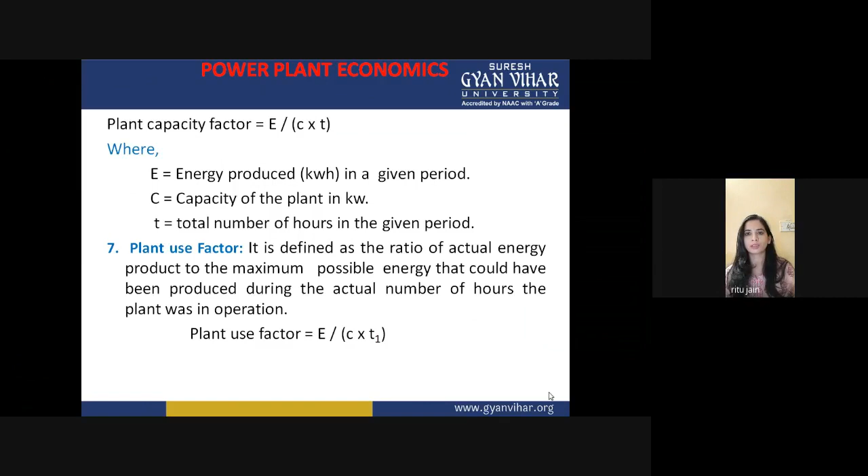In the next lecture, we will do some numericals based on plant capacity factor. This will help you understand what your plant capacity factor is.

Where E is energy produced in a given period, C is the capacity of the plant in kilowatt, and T1 is equal to the actual number of hours the plant has been in operation.

What is maximum demand? It is the maximum load which a consumer uses at any time. It can be less than or equal to 100% of connected load. If all the devices fitted in a consumer's house run to their fullest extent simultaneously, then the maximum demand will be equal to the connected load.

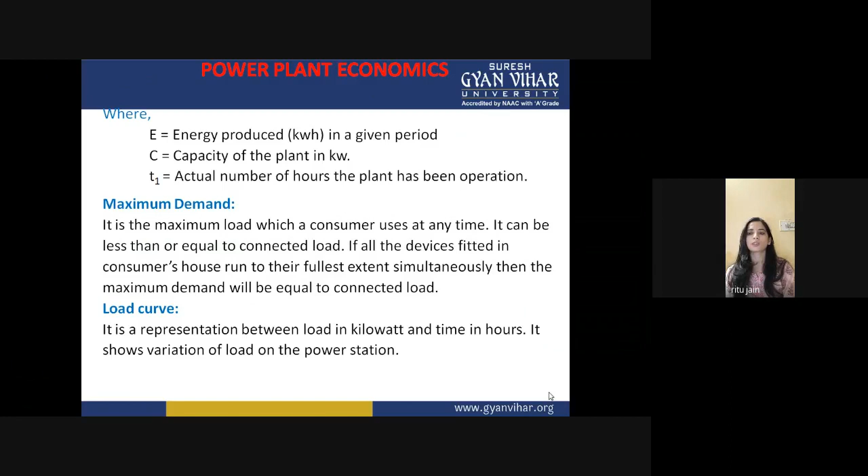Next is your load curve. What is a load curve? It is a representation between load in kilowatt and time in hours, showing the variation of load on the power station.

Now let's come to the point of what is tariff. Energy rates are different methods of charging consumers for the consumption of electricity. It is desirable to charge the consumer according to his maximum demand and energy consumed. The charge taken from the consumer is based on the maximum demand of the consumer and how much energy it is consuming. So the tariff chosen should recover the fixed cost, operating cost, and profit, etc.

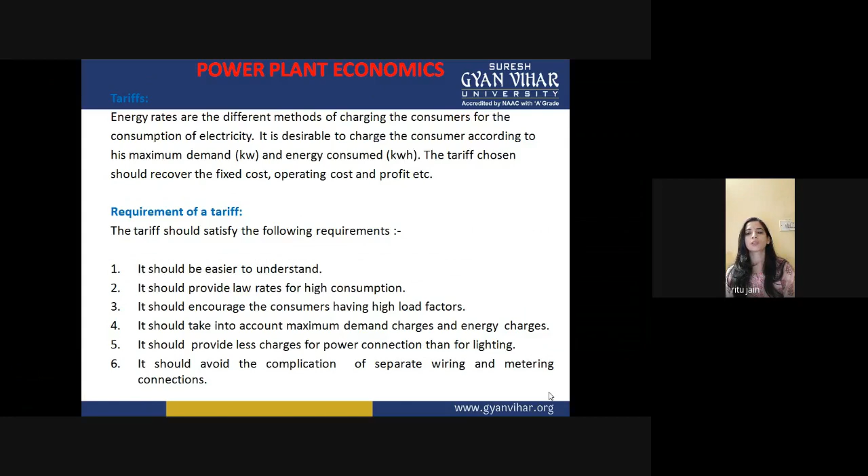Requirement of tariff: the tariff should satisfy the following requirements. It should be easier to understand. It should provide low rates for high consumption. It should encourage consumers having high load factors. It should take into account maximum demand charges and energy charges. It should provide less charges for power connection than for lighting. It should avoid the complication of separate wiring and metering connections.

So, what is the economics of power generation? Economy is the main principle in the design of a power plant. Power plant economics is important in controlling the total power cost to the consumer. The cost of power generation can be reduced by selecting equipment of longer life.

So economics of power generation is basically this: economy is the main point of any power plant, the main principal design consideration. Power plant economics is very important in controlling the total power cost, which can be reduced by selecting the right equipment.

We always want the things we are getting to be at the cheapest or minimum cost. So to minimize electricity cost, there are a few points which must be considered for the economics of power generation. Number one, selecting equipment of longer life.

If you select equipment which does not have a longer life, you will have to maintain those equipments again and again and pay charges for that. And if they are not utilizing their proper capacities, we will be in loss and the cost of electricity will be high.

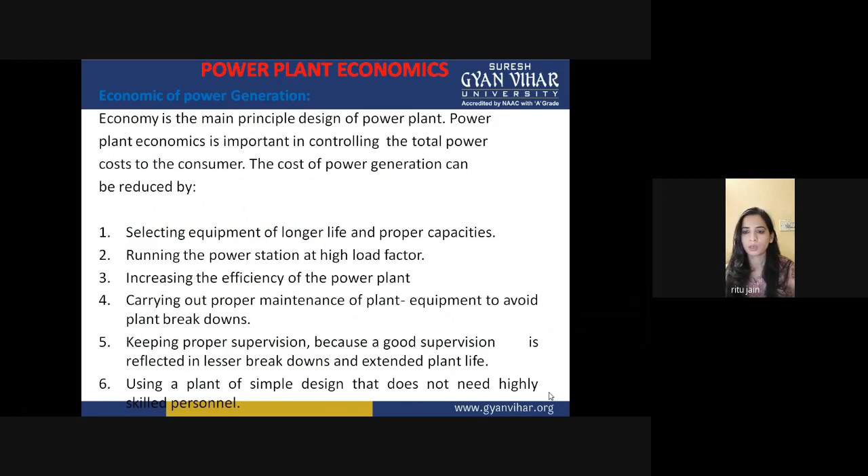Second, running the power station at a high load factor. Increasing the efficiency of the power plant, carrying out proper maintenance of plant equipment to avoid breakdowns, keeping proper supervision—because good supervision is reflected in lesser breakdowns and extended power plant life—and using a plant of simple design that does not need highly skilled personnel.

Next point is power plant site selection. The power plant site should satisfy the following requirements: cost of land as well as taxes on land should be low, and it should be nearer to the load center so that the cost of transmitting energy is low.

It should be accessible by road, rail, or sea so that transportation of fuel is easier. Sufficient quantity of cooling water should be available near the site. The site should be away from thickly populated areas in order to avoid atmospheric pollution and reduce noise.

Next, sufficient space for future expansion of the power station should be available near the site. The subsoil conditions should be such that the foundation can be made at a reasonable depth.

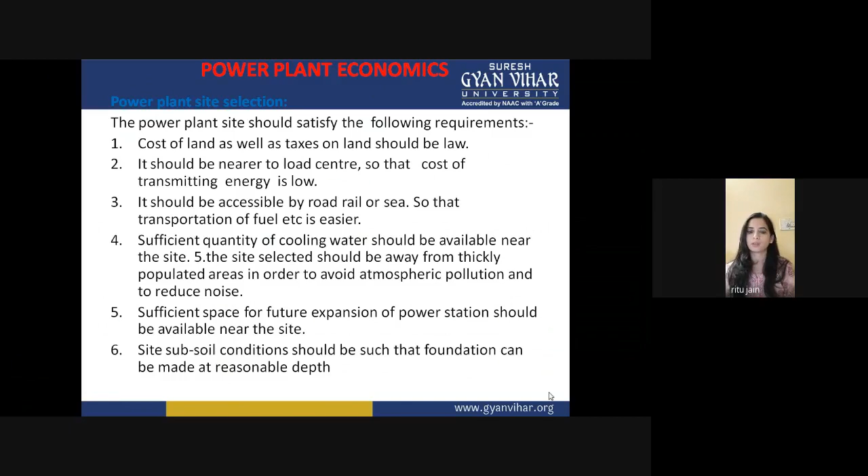Let's start and understand all these points with a problem. Problem number one: a power station has a maximum demand of 80 into 10 to the power 3 kilowatt, and the daily load curve is defined as follows. We have already discussed the load curve.

Load curve is always plotted with time on the x-axis and load on the y-axis, always in kilowatt or megawatt. So a power station has a maximum demand of 80 into 10 to the power 3 kilowatt, and the daily load curve is given.

From 0 to 6 hours the load is 40 megawatt, 6 to 8 hours the load is 50 megawatt, 8 to 12 hours the load is 60 megawatt, 12 to 14 hours it is 50 megawatt, 14 to 18 hours it is 70 megawatt, 18 to 22 hours it is 80 megawatt, and 22 to 24 hours it is 40 megawatt. Determine the load factor of the power station.

So this is our solution. Maximum demand is already given, so we have to find the load factor. For this, we first calculate the energy, then calculate the average load. After calculating average load, maximum demand, and energy, you can easily calculate the load factor.

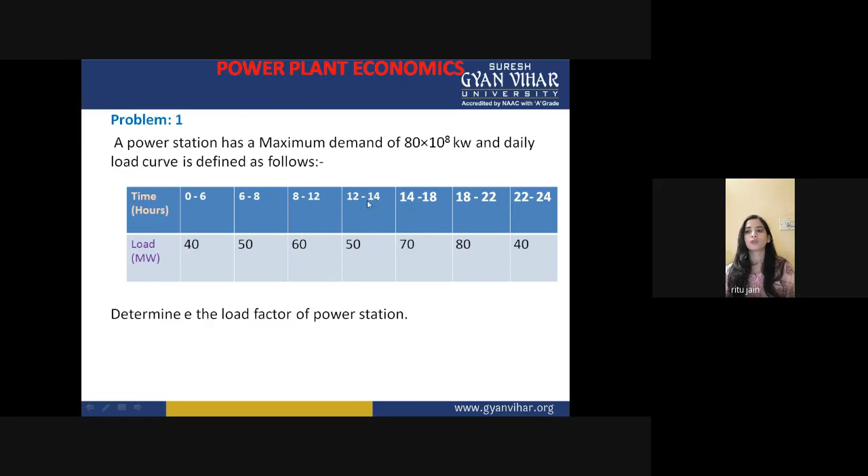So what we are doing: 40 megawatt load for 6 hours, then 6 to 8, for 2 hours you are using 50 megawatt. 8 to 12, meaning 4 hours, you are using 60 megawatt, and 12 to 14, again 2 hours you are using 50 megawatt. Then the next 4 hours you are using 70 megawatt, the next 4 hours you are again using 80 megawatt, and the next 2 hours you are using 40 megawatt.

So like this you calculate all the megawatt values, and if you multiply this megawatt by hours, you get the energy. So the energy consumed is 1360 megawatt hour, that is 1360 into 10 to the power 3 kilowatt hour.

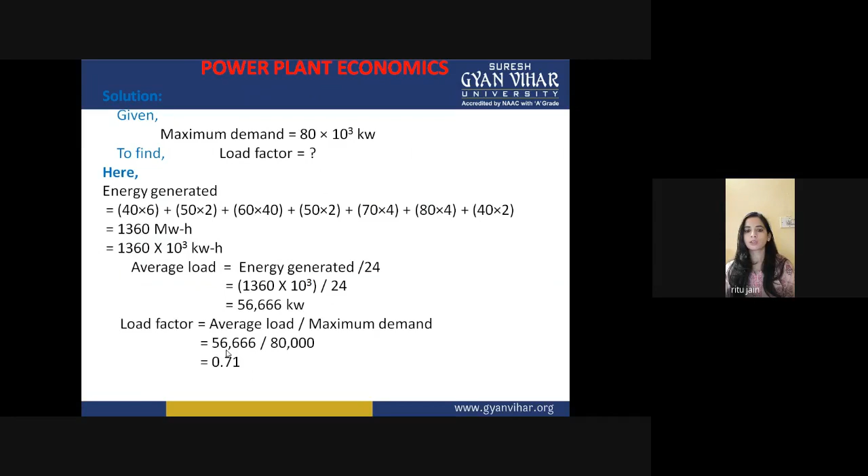And average load is equal to energy generated divided by 24. So load factor is equal to average load upon maximum demand. So that is equal to 0.71. So by using this formula, load factor is always less than 1, because maximum demand is always greater than your average load. So that's why you are getting here 0.71, which is your load factor, and which is less than 1.

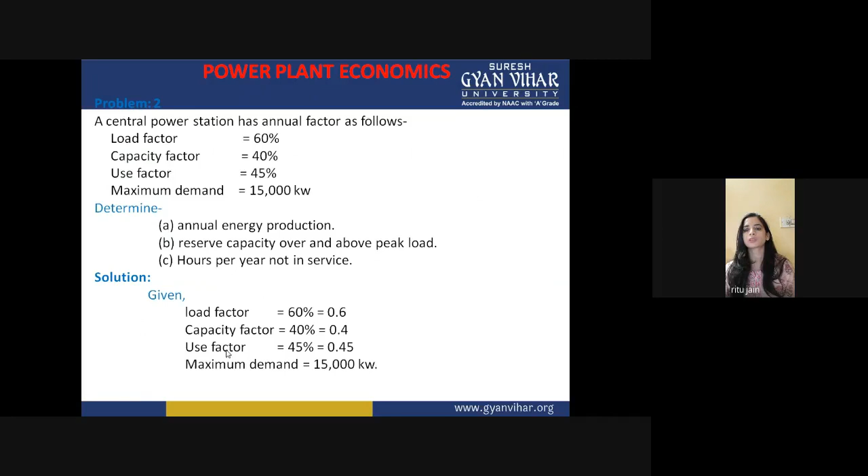So next problem is, a central power station has annual factors as follows. Load factor is equal to 60%, capacity factor is given 40%, use factor is given 45%, and maximum demand is given 15,000 kilowatt. So first, you have to determine annual energy production, reserve capacity over and above peak load, and hours per year not in service. Load factor is equal to 60%, capacity factor is equal to 40%, and use factor 45%. So maximum demand is given this. So now we can solve this.

First, you have to find out annual energy production in kilowatt hour, reserve capacity over and above peak load, hours per year not in service. So load factor is equal to average load upon maximum demand, and average load is equal to load factor into maximum demand, 0.6 into 15,000, that is equal to 9,000 kilowatt. Okay, and the next one is your annual energy produced, that is your average load into total hours in 1 year. So total hours in 1 year, if you multiply 365 days into 24, you will get 8760 total hours in a year.

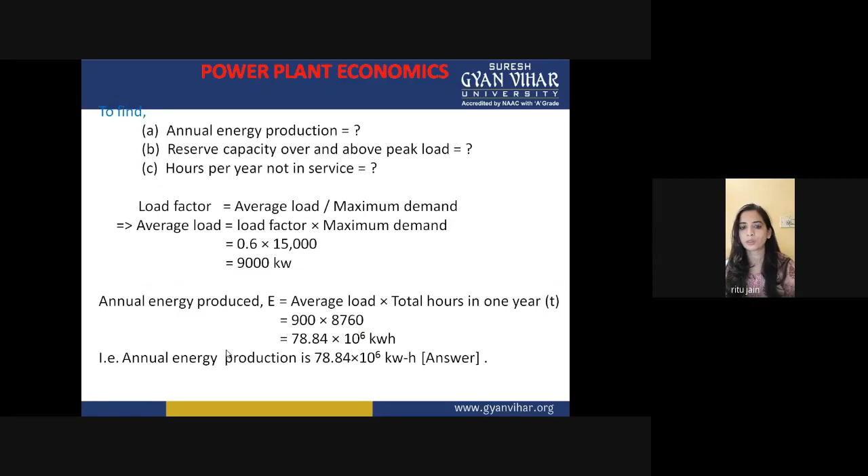So the 9,000 kilowatt can be multiplied by 8760, and you will get 78.84 into 10 to the power 6 kilowatt hour. So the annual energy production is 78.84 into 10 to the power 6 kilowatt hour. So this is all about your problem 2, and like this you can also calculate the capacity factor, which is equal to E upon C into T. C is equal to E upon capacity factor into T. Capacity factor is already given, that is your 40%. So you are taking here 0.4 into 8760.

So the point is, you have to remember these formulas to calculate the different values, which are used to analyze the power plant, or which are used for the economics of power plant. So this is all about your power plant economics. So next problem is,

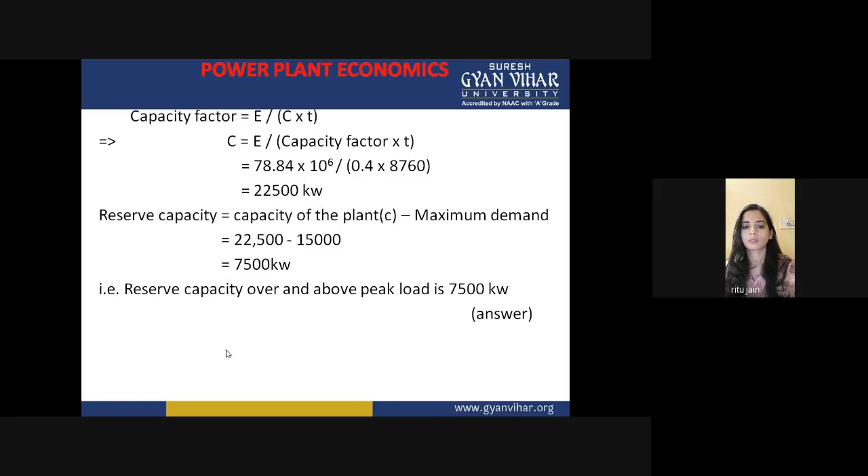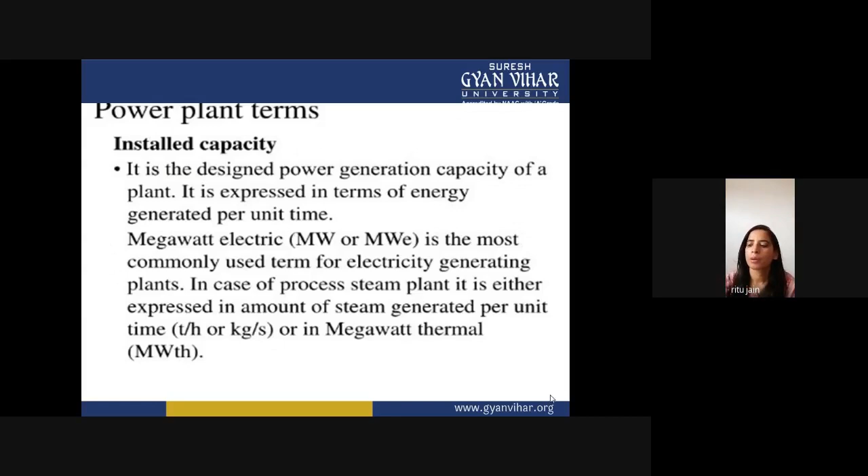So this is all about your installed capacity, which is generally in terms of megawatt, or if you want to express it in steam, you can express it in kilogram per second or megawatt thermal. Okay, so this is your power plant capacity or installed capacity. Now we come to the next point, that is efficiency.

If you are installing a power plant, obviously you have to find out whether this power plant is working efficiently or not. So for this, you have to calculate the efficiency of the power plant. There are a few calculations used to find out the efficiency of a power plant. One of them is heat rate. We have already discussed that the unit of energy you can represent in kilowatt hour, or in kilojoule. So it is the amount of energy that the fuel must supply to produce a unit amount of electrical energy.

Okay, so heat rate means that suppose the fuel is supplying energy in kilojoules, and the production of unit amount of electrical energy is in kilowatt hour. So it is expressed as kilojoule per kilowatt hour. That is your heat rate. Okay, hope you can understand.

Suppose the amount of energy is in kilojoule, and from that amount of energy you are getting 1 kilowatt hour unit. 1 kilowatt hour means one unit. If you are getting 2 kilowatt hour, it means 2 units. So from this amount of energy you are getting the unit, that is your heat rate. So heat rate expresses that you are burning this amount of fuel, and after that this amount of electricity is produced. So the heat rate is equal to kilojoule per kilowatt hour.

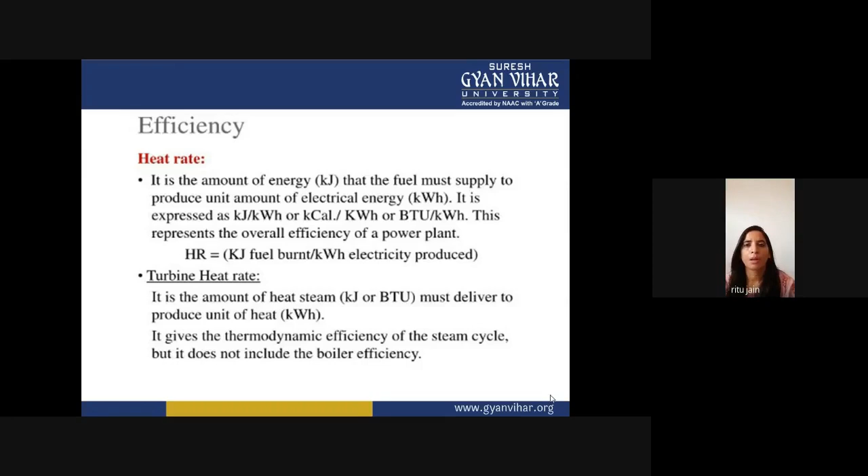Now, it gives the thermodynamic efficiency of the steam cycle, but it does not include the boiler efficiency. Okay, so this is about the efficiency which must be calculated for a power plant. Next, efficiency can again be divided into two parts. One is thermal efficiency: the amount of heat carried by the steam per unit amount of heat delivered through the fuel. Next is combustion efficiency. Hope you can understand what thermal efficiency is.

Thermal efficiency is the heat which is carried by the steam per unit amount of heat delivered through the fuel. And combustion efficiency is how much energy you are getting after combustion of fuel. So what is the difference between thermal efficiency and combustion efficiency? In combustion efficiency you are getting heat from the fuel, and how much heat you require to convert that water into steam comes into thermal efficiency. You can say how much heat you are using out of what you get from combustion of the coal. That is the basic difference.

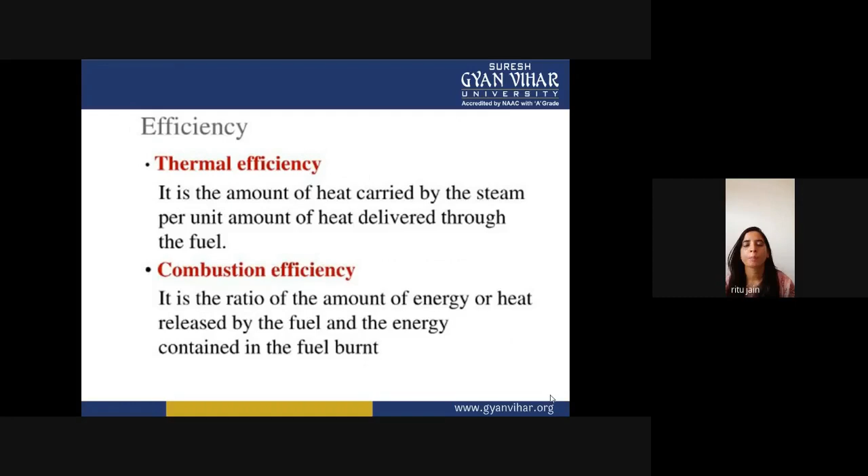So combustion efficiency is the ratio of the amount of energy or heat released by the fuel and the energy contained in the fuel burned. Okay, so this is your combustion efficiency and thermal efficiency. Let's come to the next point.

Now, this is a very important diagram. So you can see that there are 4 units. Every power plant has 3, 4, or 5 units according to the requirement or the load demand, and each unit has its own generator. In this diagram you can see that there are 4 units, 4 generators and different types of consumers. Some units are supplying some of the consumers, which are customer one and customer two.

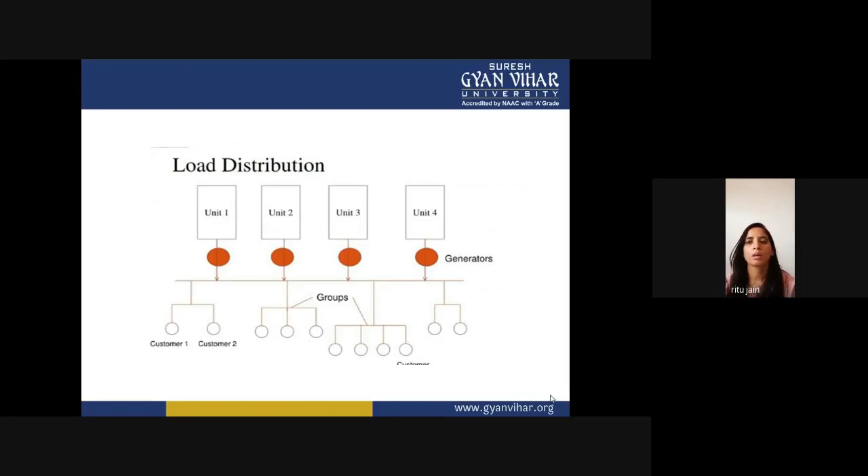Unit 2 and Unit 3 are supplying different customers, and Unit 4 is supplying electrical energy to different customers. So this is your load distribution. We will discuss it in detail in our next slide. So this is a graph or a diagram of your load distribution.

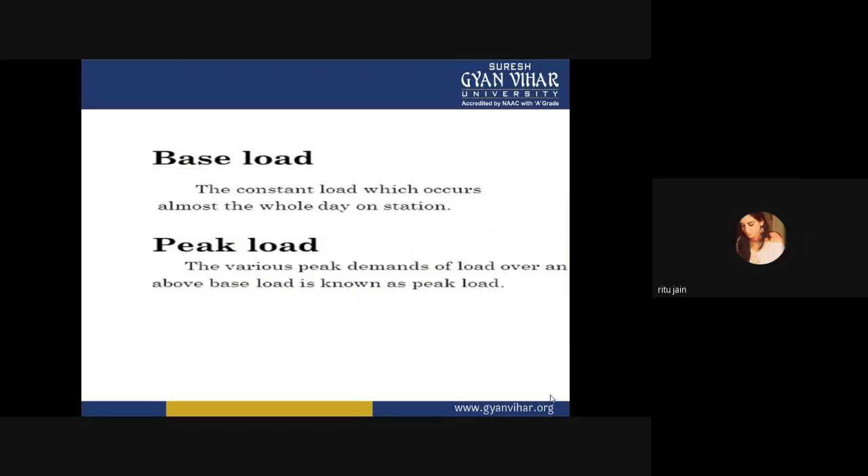Next, we come to the base load and peak load. So, what is base load? Base load is the constant load, the load which is not changing with time. That is your base load. It is almost the same the whole day. And peak load varies. The various peak demands of load over and above the base load are known as peak load.

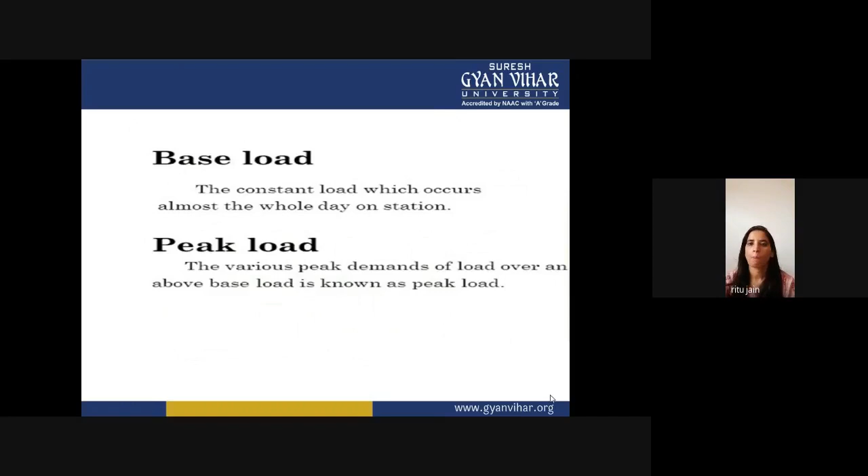Now there are different loads: domestic load, commercial load, industrial load, base load, and peak load, which we have already discussed. So what is domestic load? Everyone knows: light, fan, refrigerator, heaters, television, small motors for pumping water. Most of the residential load occurs only for some hours during the day. That is your domestic load.

For example, lighting load occurs during night time and domestic appliance load occurs for only a few hours. For this reason, the load factor is low. We will discuss load factor. So domestic load is actually not consistent. In day hours, you do not require your heaters, television, and small motors the whole time. They are used for a particular period of time in a day.

And lighting loads basically occur during the night because in India we get so much daylight, so we do not need any kind of lighting load in day hours. So this load comes into the category of domestic load. Most of it is residential load, which comes into this category.

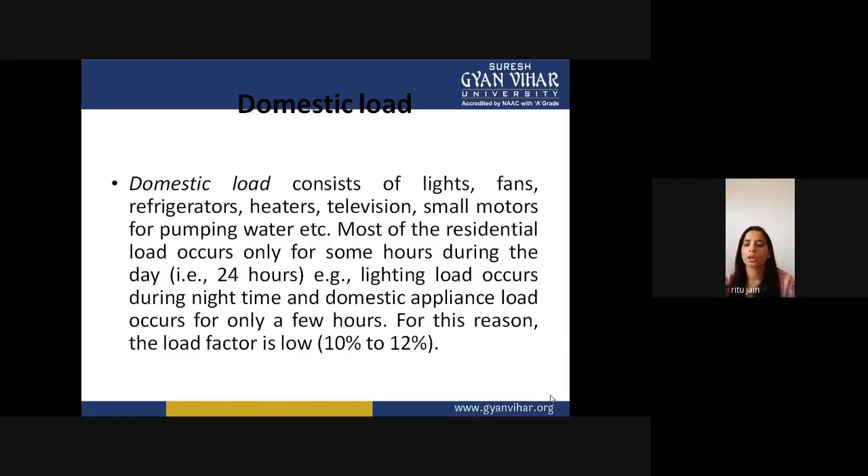Next is commercial load. This type of load consists of lighting for shops, fans, and electric appliances used in restaurants, etc. This class of load occurs for more hours during the day as compared to the domestic load. The commercial load has seasonal variations due to the extensive use of air conditioners and space heaters.

So this load comes into the category of commercial load, which is mostly used in restaurants and companies. For example, some institutions where working hours are from 9 to 5 are using fans, ACs, and other loads in the daytime. So this type of load comes into the category of commercial load.

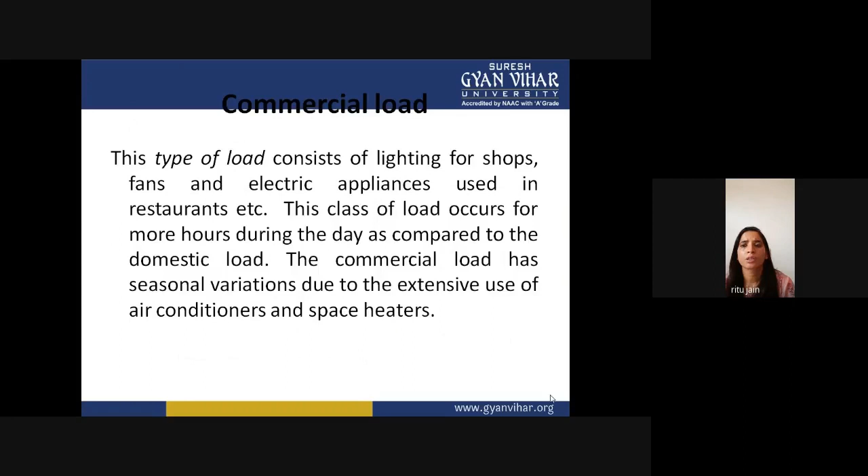Now we come to the industrial load. Industrial load consists of the load demand by industries, how much load you require from the power plant for your industry. The magnitude of industrial load depends upon the type of industry. It may be small scale, medium scale, or large scale industry. Small scale industry requires up to 25 kilowatt load. Medium scale industry requires between 25 kilowatt and 100 kilowatt. And large scale industry requires load above 500 kilowatt.

Industrial loads are generally not weather dependent. It will depend upon what kind of industry it is, how many machines it has, and what the production of this industry is. So industrial load is not seasonal. It will depend upon the size of the industry. If the industry is small, you require 25 kilowatt. If the industry is medium size, you require between 25 kilowatt and 100 kilowatt. And a large industry requires 500 kilowatt load.

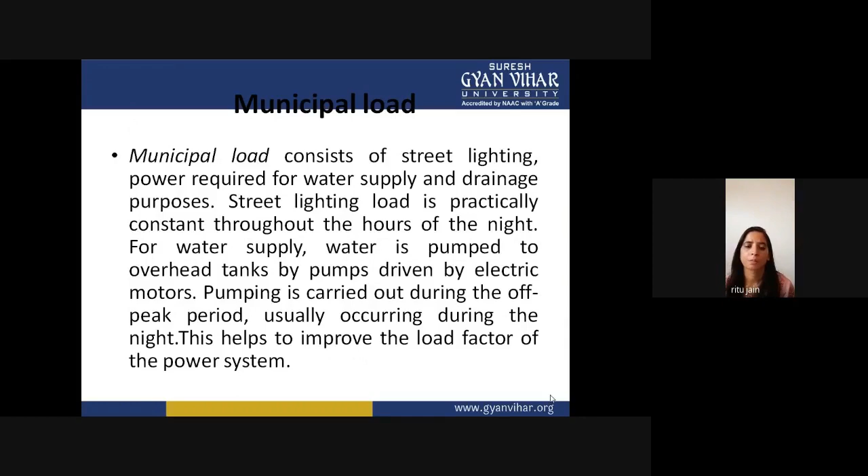Okay, so these are the different types of loads. Next is your irrigation load. This type of load is the electrical power needed for pumps driven by motors to supply water to fields. Generally, this type of load is supplied for 12 hours during the night.

Traction load: this type of load includes tram cars, trolley buses, railways, etc. This class of load has wide variation. During the morning hours, it reaches peak value because people have to go to their workplace. After morning hours, the load starts decreasing and again rises during the evening, since people start coming to their homes.

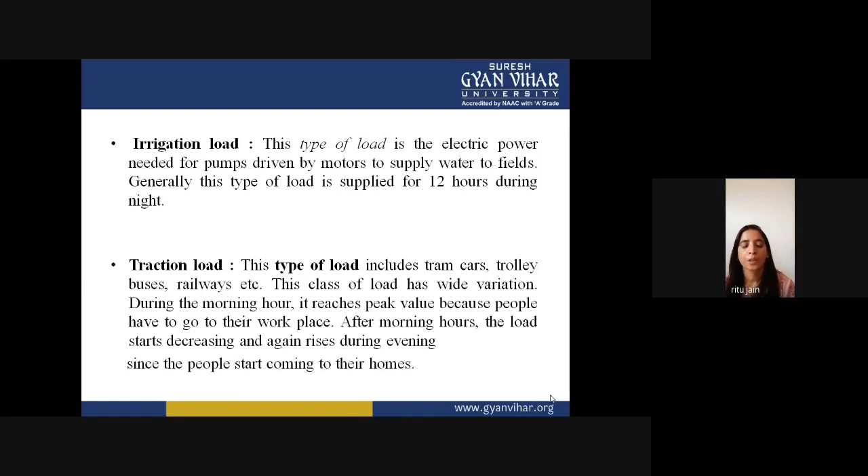So there are different kinds of load, depending upon the time and when you require the appliances or not. So there are different types of loads which you can classify into different categories. Now, according to this load, the power plant demand is identified, and according to that, the units are used in a power plant.

So, types of load curve. There are different types of load curves, divided into these seven categories. One is your daily load curve, which means the load variation with time during the whole day. Second is your monthly load curve, obtained from the daily load curve, and the load curve obtained from the monthly load curve is called the yearly load curve. Then your load duration curve, integrated load curve, mass curve, and chronological curve. In this lecture, we will discuss the load duration curve, mass curve, and chronological curve, because they are very important.

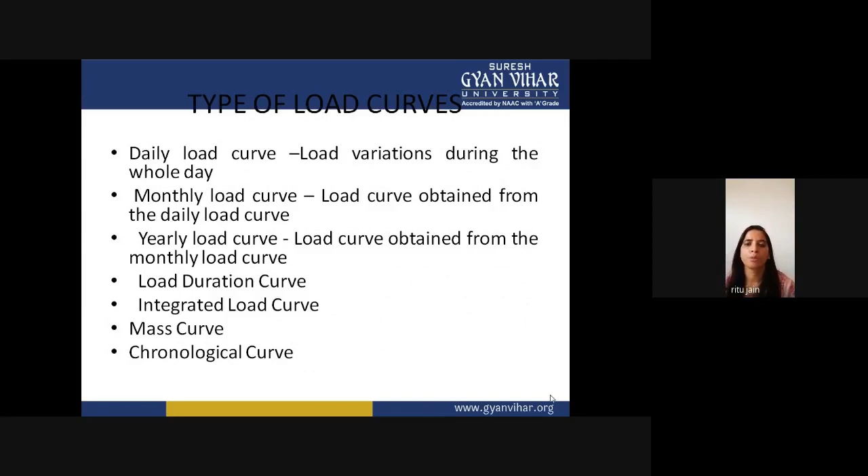So the definition of the load curve: the curve showing the variation of load on the power station with respect to time is called the load curve. The power demands of different consumers vary in accordance with their activities day to day. The result of this variation in demand is that the load on a power station is never constant; rather, it varies from time to time.

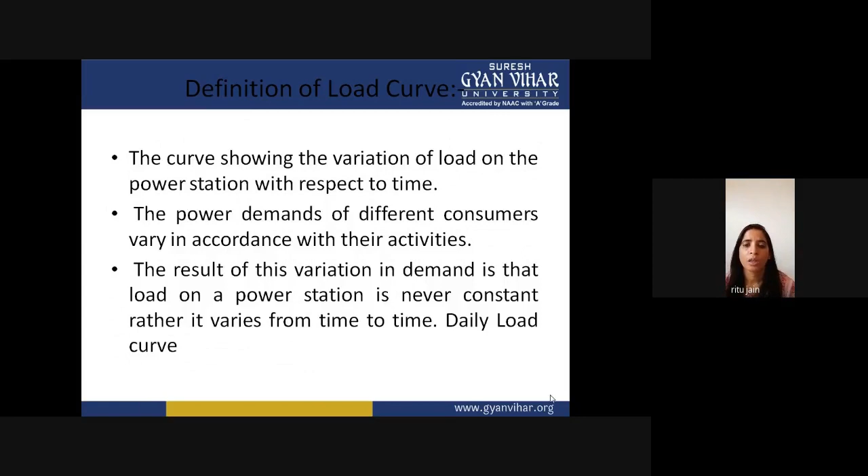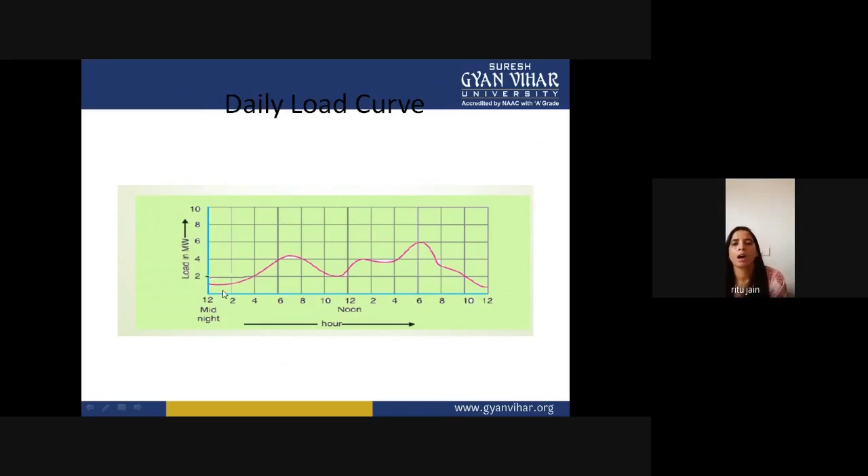After 12 noon, it again starts increasing in summer because everyone turns on their coolers, ACs, and refrigerators. After that, it is almost constant, and again at 6 p.m. it reaches a peak. After 10 p.m. in the night, it reduces and becomes almost constant for 2 or 3 hours. So this is your daily load curve, in which you can see the load variation hour to hour in a day.

Now, the importance of the daily load curve. The daily load curve has attained great importance in generation. Actually, if we don't know what our demand is, we will not be able to set up any power plant. So these are some important points which we can find from our daily load curve, as it supplies the following information.

First, the daily load curve shows the variation of load on the power station during different hours of the day. Second, the area under the daily load curve gives the number of units generated in the day. So units generated per day equals the area under the daily load curve. Okay.

So from the graph, you can easily find out how many units are generated by a power plant by calculating the area under the curve. The highest point on the daily load curve represents the maximum demand on the station on that day. So the area under the daily load curve divided by the total number of hours gives the average load on the station in the day.

Now we can calculate average load: the area under the daily load curve divided by 24 hours, then you can easily get the average load. This is the formula of average load, which is very important. Now, the load curve helps in selecting the size and number of generating units. So the load curve helps in preparing the operation schedule of the station.

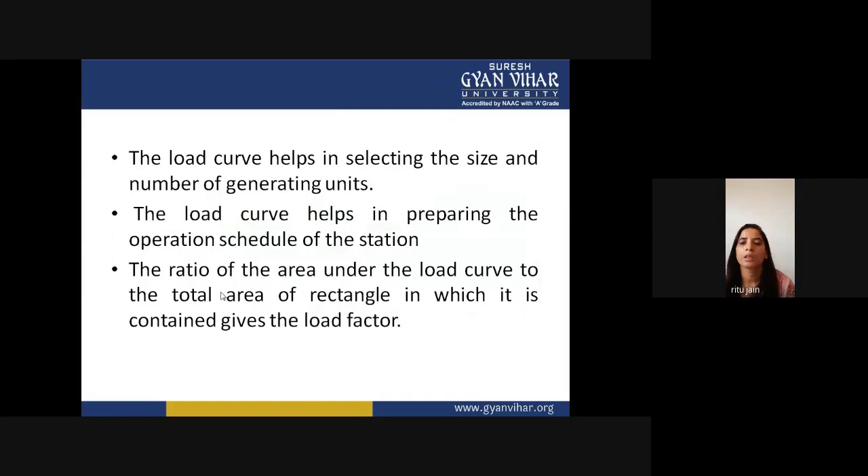And the ratio of the area under the load curve to the total area of the rectangle in which it is contained gives the load factor. We will discuss load factor in the next slide. Now, let's come to the load duration curve. Okay, we discussed the daily load curve. We plot the daily load curve between time and load.

Okay, so the load duration curve is an arrangement of all load levels in descending order of magnitude. First you take your maximum load, then the load which is less than your maximum load, selecting these loads in descending order. So the area under the LDC represents the energy demanded by the system. It can be used in economic dispatching, system planning, and reliability evaluation. It is more convenient to deal with than the load curve.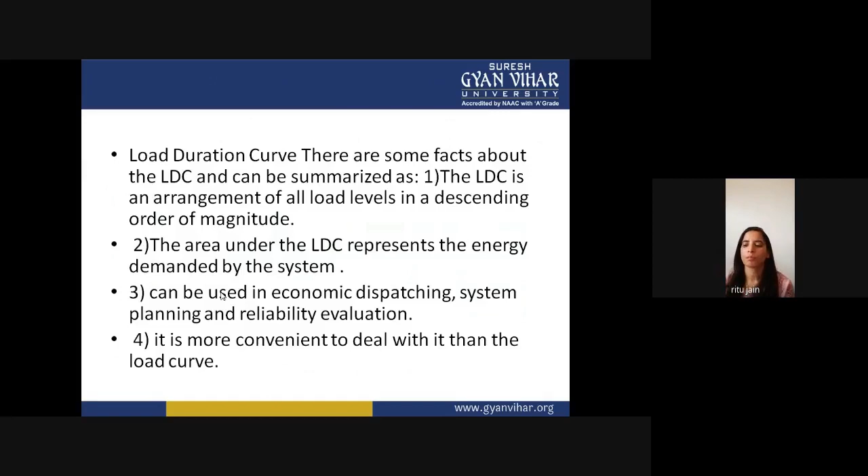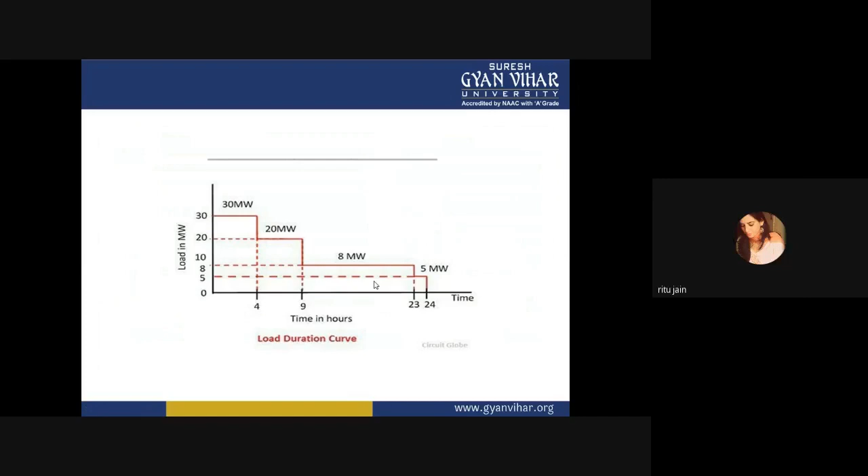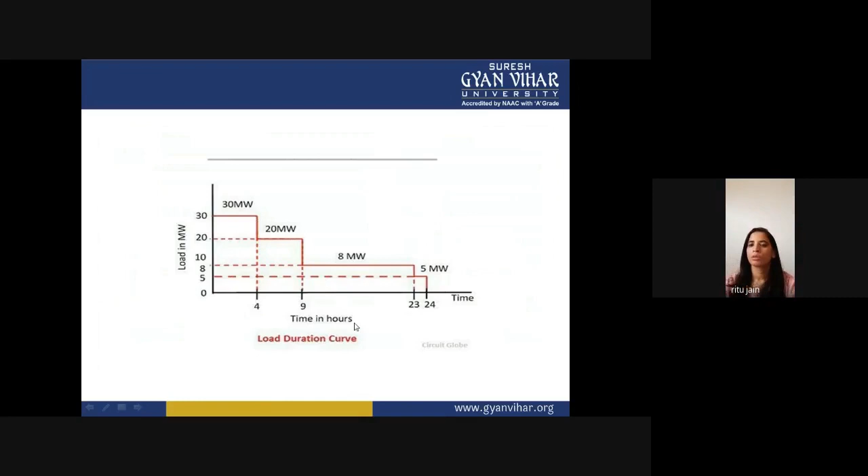In another load duration curve, you can see that for 4 hours the load is 30 megawatt. You can see that we are arranging this load in descending order: first 30 megawatt, then 20 megawatt, then 8 megawatt, then 5 megawatt. And this is time in hours. So this is the basic difference between the daily load curve and the load duration curve. The daily load curve is drawn according to time of the day, but this is hours duration.

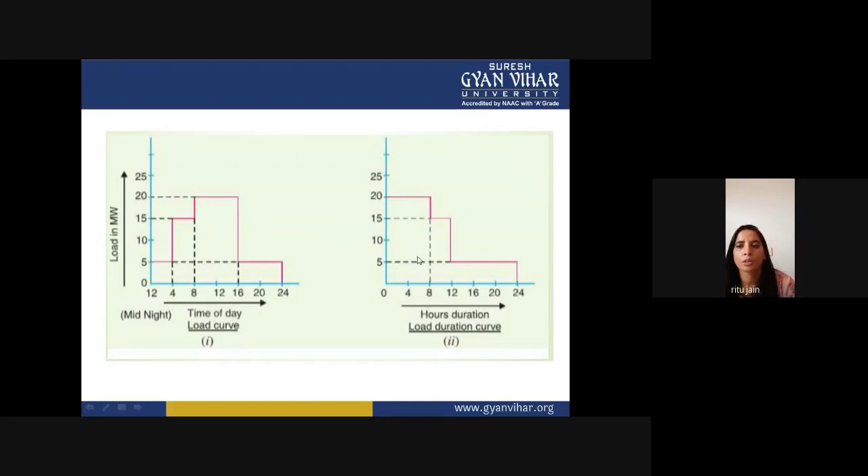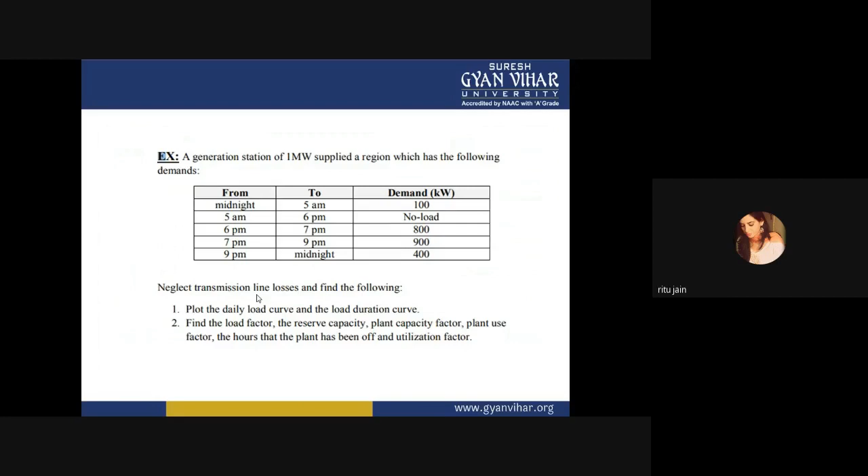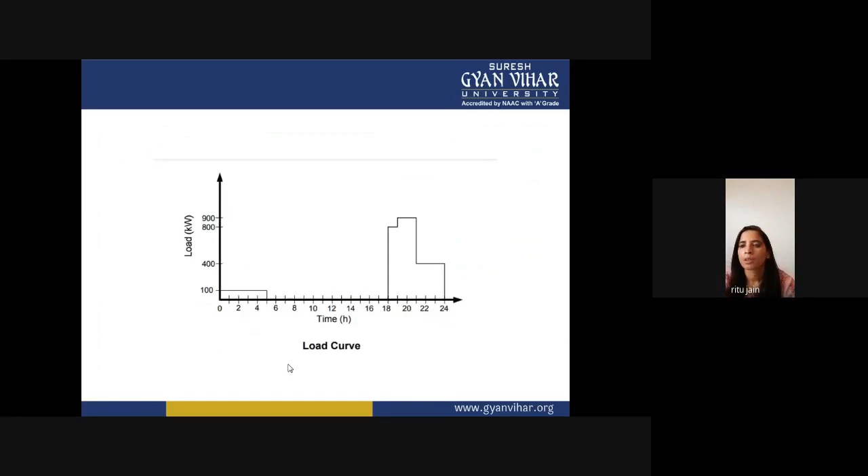Next you are using 400 kilowatt load, which is for 9 p.m. to midnight. So this 400 load, this is your 400 load, from 9 p.m. to midnight

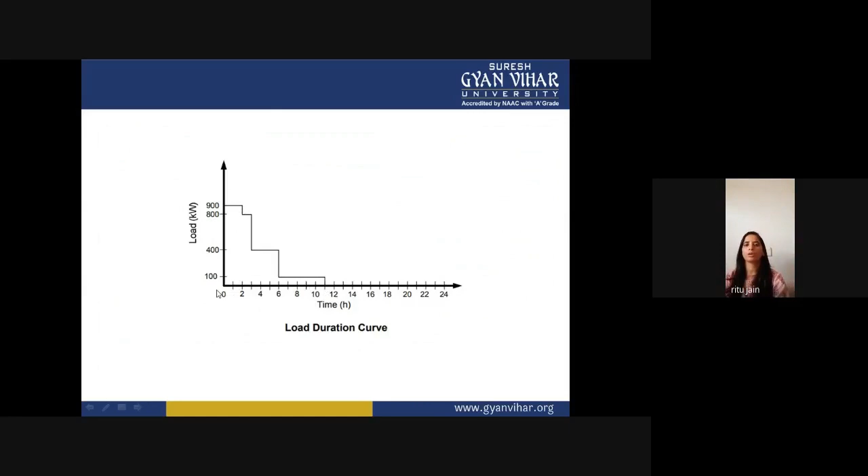Next is your 100, which is from midnight to 5 a.m. So from midnight to 5 a.m. you can easily calculate it, it is 5 hours. So for 5 hours, this load is your 100 kilowatt. So we are taking hourly load over here in the load duration curve. So this is the basic difference between your load curve and load duration curve.

Now we come to the next point: the following are the information obtained from load curves. The daily load curve determines the load variation during different hours of the day. It indicates the peak load, which determines the maximum demand on the power station. The area under the load curve gives the total energy generated in the period under consideration.

The area under the curve divided by the total number of hours gives the average load. The ratio of the area under the load curve to the total area of the rectangle in which it is contained gives the load factor.

Utility of load curve. The following are the utility of the load curve. The load curve decides the installed capacity of a power station. If you don't know how much load you require, then you are not able to generate the electricity. So the load curve decides the installed capacity of a power station.

It is helpful in choosing the most economical size of the various generating units, because there are different generating units in a power plant. Most economic generation means connecting those generating units according to your load. Suppose the generating unit capacity is 500 megawatt, and you have connected only 200 megawatt to this generating unit, then you are not utilizing its full capacity.

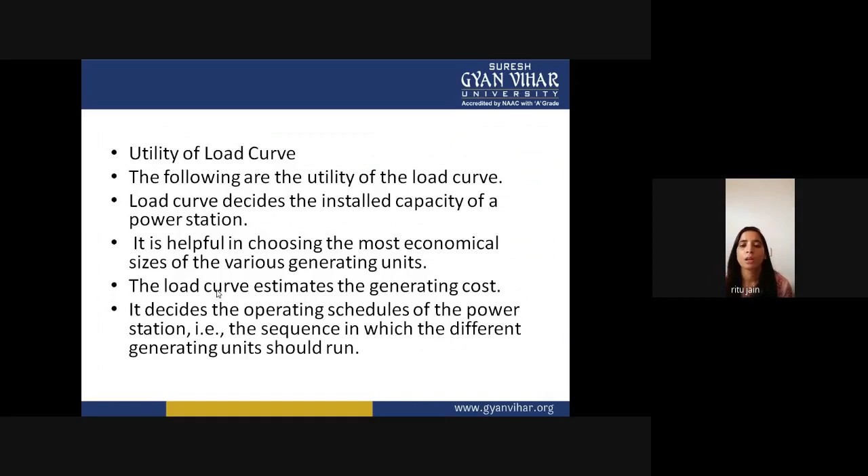Then the load curve estimates the generating cost. It decides the operating schedules of the power station, that is, the sequence in which the different generating units should run.

Next, we come to the chronological load curve. This is also important. We already calculated the average load on the power station in a given time period, which depends on the load variation.

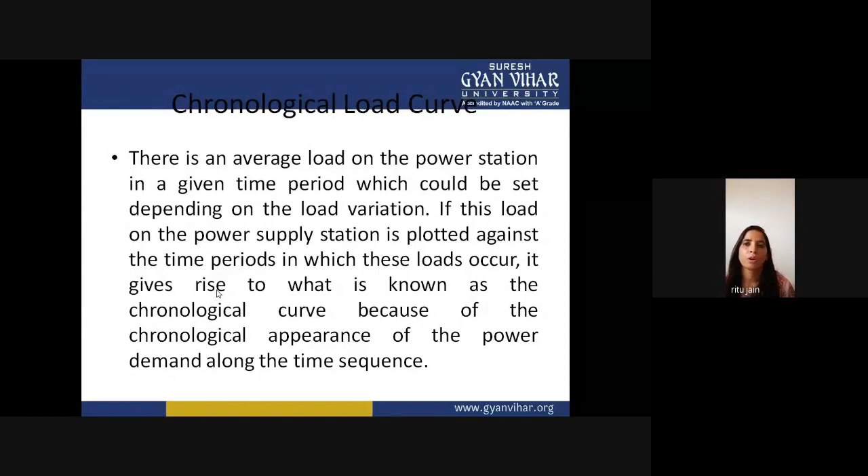Average load versus time defines the chronological load curve. It's called chronological because of the chronological appearance of the power demand along the time sequence.

Next we come to the mass curve, which is very important. The mass curve is basically drawn for hydropower plants. It is the plot of accumulated inflow or outflow versus time. The mass curve of supply is first drawn and is superimposed by the demand curve.

The procedure to construct such a diagram is as follows. These are the steps by which you can easily draw the mass curve. From the past records, determine the hourly demand for all 24 hours.

For typical days: maximum, average, and minimum. What is the maximum requirement in a particular day, what was the average requirement, and what is the minimum requirement for that particular day.

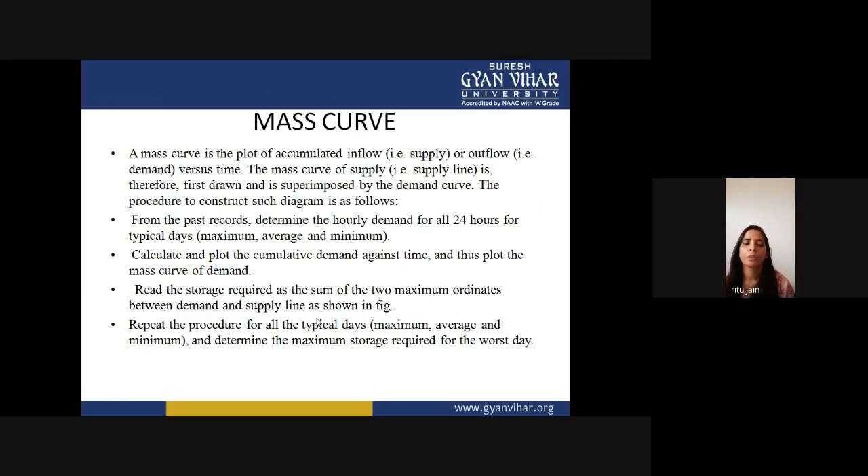Now there are some MCQs based on this lecture which you can easily solve. First question: what is the advantage of sectionalizing of power plant? Sectionalizing of power plant is a must to get high reliable electricity. High reliability is the main point for sectionalizing power plants.

Next, the area under the load curve represents the number of units generated.

Now, which of the following is equal to the maximum demand? The peak of the load curve is defined by the maximum demand. The load duration curve indicates the variation of load during different hours of the day, the total number of units generated, the given demand, the total energy consumed by the load, and the number of hours for which the particular load lasts during a day.